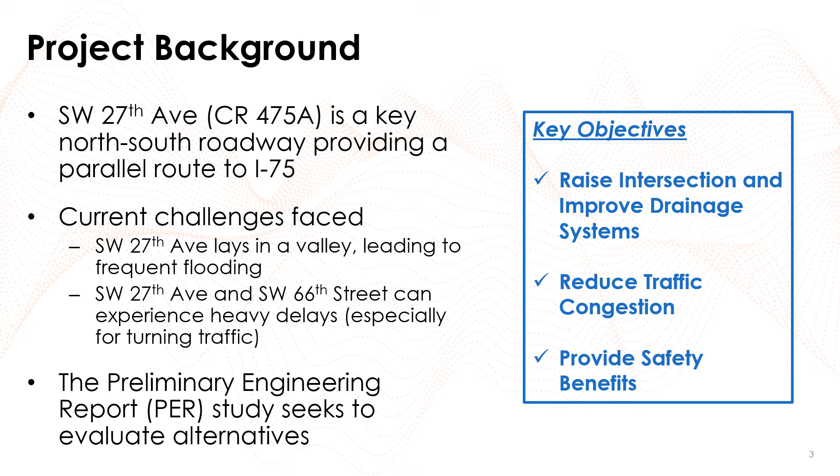The Preliminary Engineering Report, or PER, was initiated to evaluate potential improvements at the intersection and address both existing and future transportation needs. Specifically, the study looked to evaluate alternatives that accomplish three key objectives: raise the intersection and improve drainage, reduce traffic congestion, and improve overall safety for motorists.

This next section summarizes how future traffic conditions were forecast. Understanding future demand is critical because the recommended alternative must perform not only today, but also decades into the future. We reviewed historical traffic data collected between 2016 and 2024 and compared those trends with projections from the Regional Travel Demand Model. The data indicated continued growth throughout the corridor, reinforcing the need to evaluate how the intersection will function as traffic volumes increase over time.

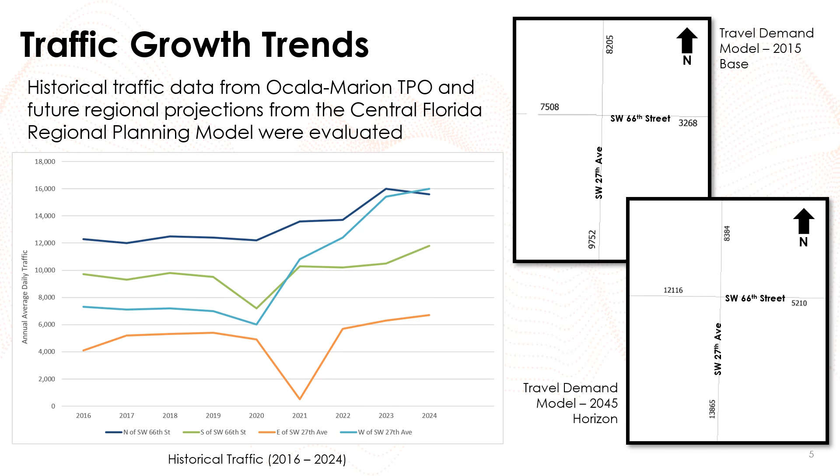Through coordination with Marion County staff and a review of the historical and travel demand model data, annual growth rates were selected for each leg of the intersection. The study evaluated two future time periods for operational and safety performance of the alternatives. 2028 was selected as the opening year for intersection improvements, and a 20-year life cycle was evaluated, resulting in a 2048 horizon year. The projected traffic volumes based on the selected annual growth rates show meaningful increases between the opening year and the 2048 horizon year. These forecasts form the basis for both the operational and safety analysis that follow.

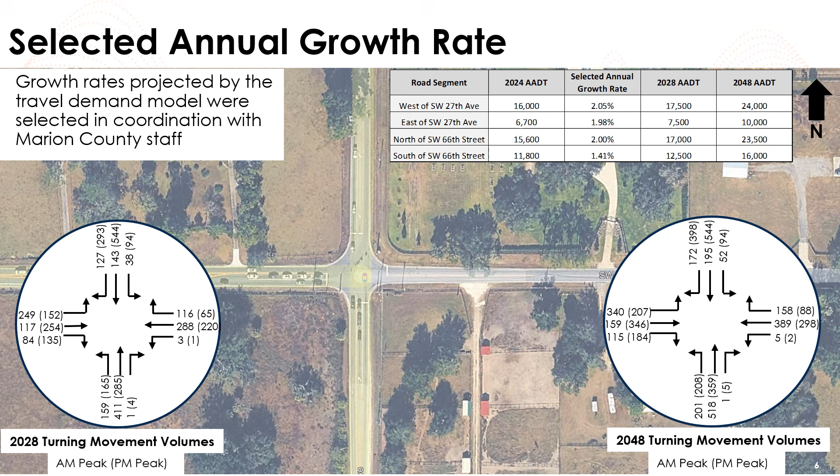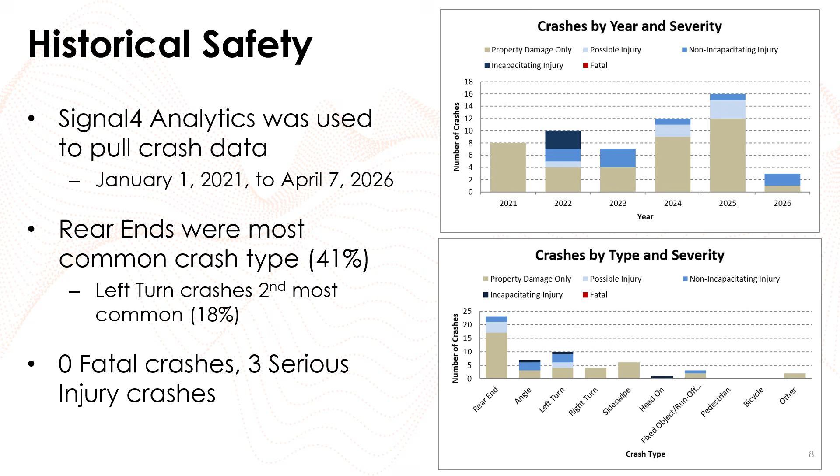Crash records were evaluated using data from January 2021 through April 2026. Rear-end crashes represented the most common crash type, accounting for approximately 41% of crashes, while left-turn crashes were the second most common at 18%. Importantly, no fatal crashes were recorded during the study period, although 3 serious injury crashes occurred. These crash patterns are consistent with intersections experiencing congestion and turning movement conflicts.

We also evaluated future safety using the Florida Department of Transportation's SPICE methodology, which forecasts crashes based on geometry, traffic volumes, and traffic control type. The analysis evaluated a 20-year project lifecycle from 2028 through 2048. The results indicate that roundabout alternatives are expected to produce fewer crashes over the life of the project than signalized alternatives.

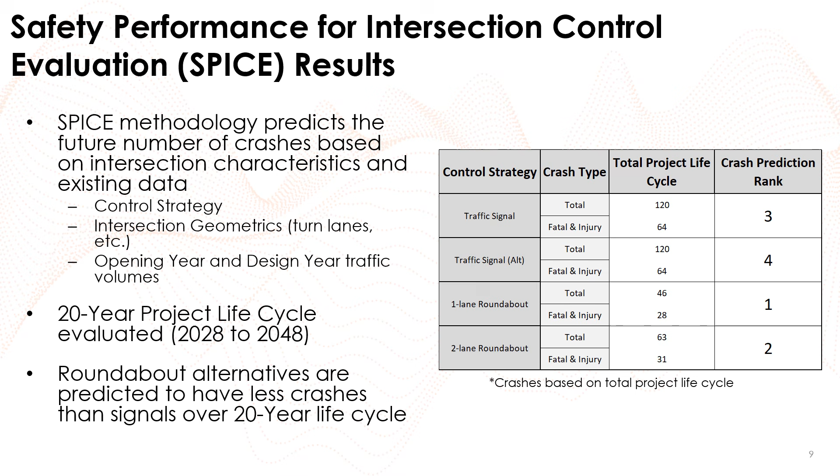The next section evaluates each alternative in terms of traffic operations. Traffic operational performance is measured using level of service, or LOS, which is based primarily on intersection delay. The longer a vehicle is expected to be delayed at an intersection before being able to complete a movement, the lower the LOS grade. Marion County also maintains target LOS standards for roadways, and these were considered in the analysis.

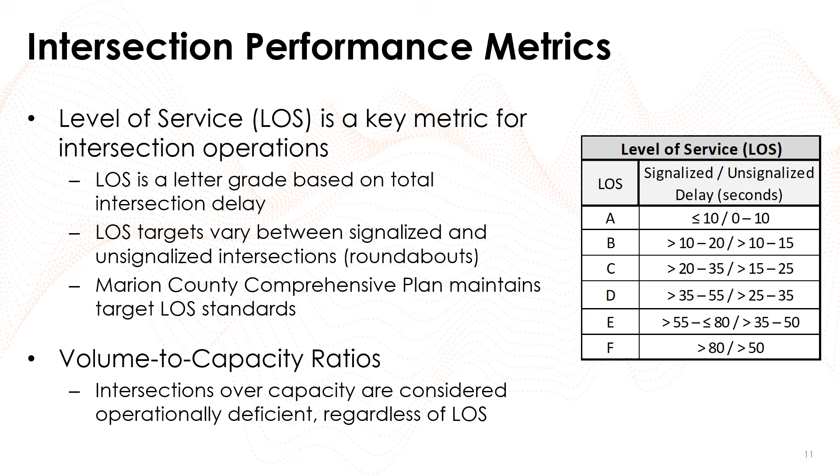Another key traffic operations metric is if the approaching volume of vehicles exceeds the existing capacity of the intersection. These volume to capacity ratios are important because an intersection can sometimes achieve a reasonable LOS while still approaching capacity limits.

Under the existing configuration, the intersection performs acceptably in the opening year. However, by the 2048 design year, the intersection exceeds capacity during both peak periods and degrades to LOS-E in the morning peak and LOS-F in the evening peak. This confirms that the existing configuration is not a viable long-term solution.

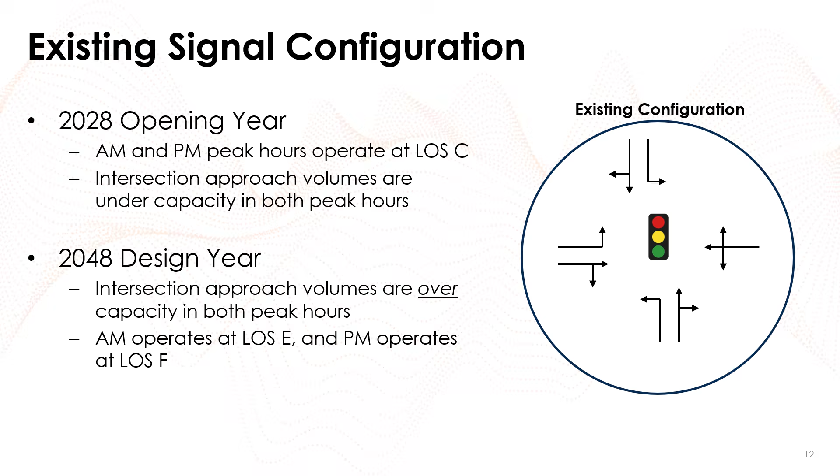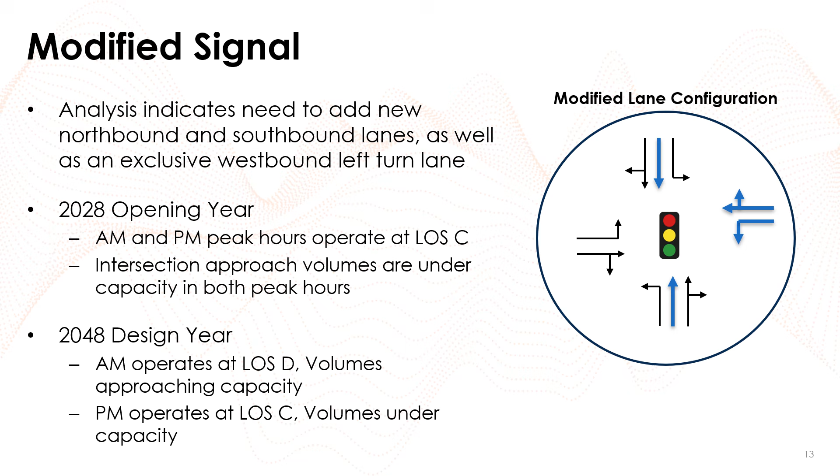A modified signal alternative was developed to add capacity through the intersection. This is achieved through additional northbound and southbound lanes along with an exclusive westbound left turn lane. This alternative substantially improves operations and maintains acceptable performance through the horizon year. In 2048, the intersection is projected to operate at LOS-D during the morning peak and LOS-C during the evening peak.

A single-lane roundabout at the intersection was also evaluated. Initially, it performs well at opening. However, as future traffic grows, the analysis shows the intersection exceeding capacity by the design year and dropping to LOS-F during the morning peak and LOS-E during the afternoon peak.

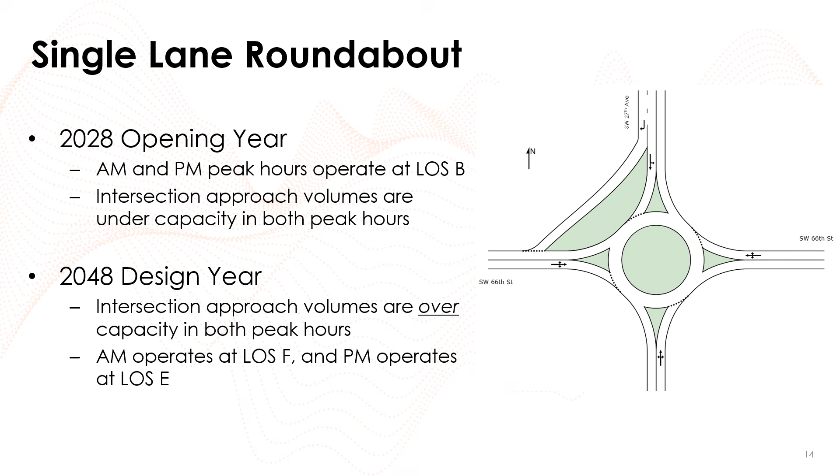A multi-lane roundabout alternative was considered to add capacity through additional lanes where needed to accommodate the projected traffic volumes. The analysis shows LOS-A performance in the opening year and LOS-B performance in the 2048 horizon year, while keeping all approaches under capacity. The multi-lane roundabout provides the strongest traffic operational performance among the alternatives reviewed.

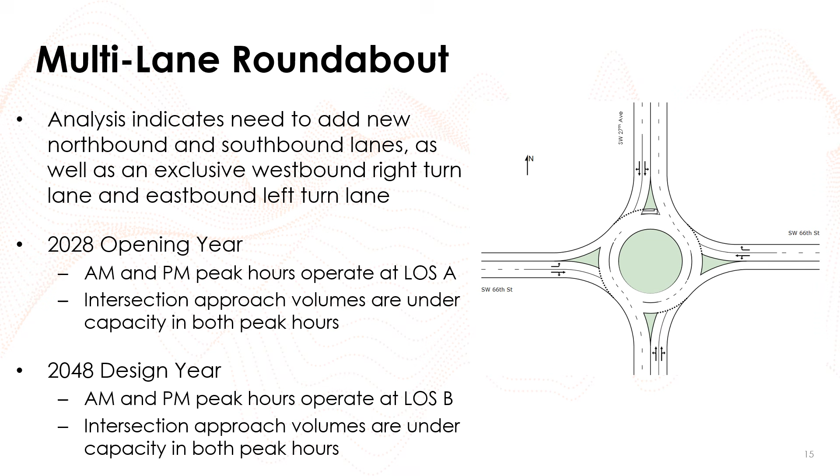This section summarizes conceptual design considerations and the associated construction costs. Conceptual designs were developed for the most viable alternatives, the modified signal and multi-lane roundabout. These designs were used to develop construction cost estimates based on FDOT best practices, including historical pay item costs and allowances for maintenance of traffic, mobilization, and additional contingencies. At this stage, the estimates represent construction costs only and do not include right-of-way acquisition costs.

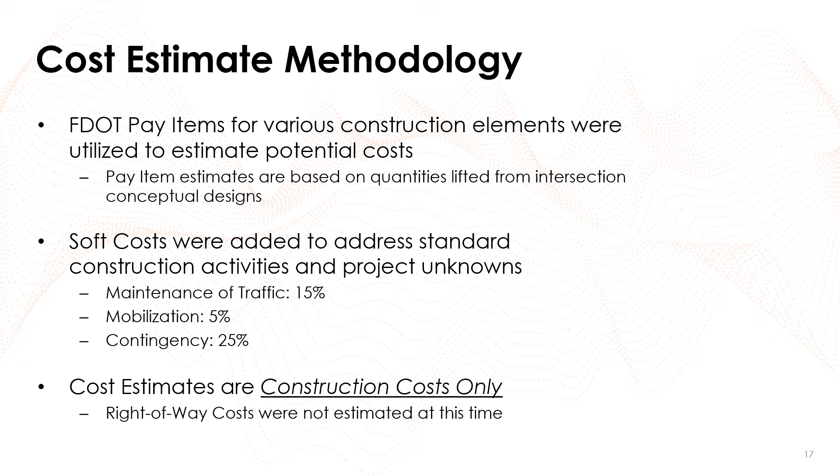Regardless of which control type is selected, substantial site improvements are necessary to address the project's primary objectives. These improvements include raising roadway elevations, enhancing drainage infrastructure, and adding intersection lighting. These critical improvements are estimated at approximately $4 to $4.3 million.

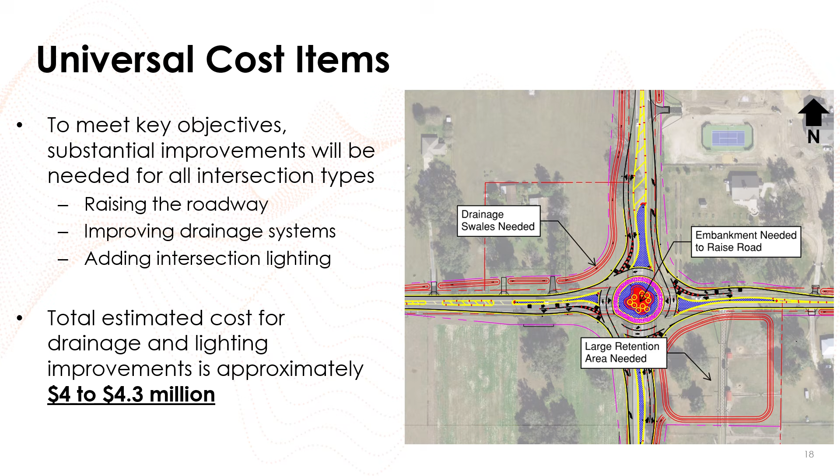This slide illustrates the conceptual layout for the modified signal alternative. This alternative would require roadway widening along North and Southwest 27th Avenue and modifications to the existing signal infrastructure. These modifications, along with the universal cost items shown previously, result in a total estimated construction cost of approximately $5.4 million for this alternative.

This slide illustrates the conceptual layout for the modified signal alternative. This alternative would require roadway widening along North and Southwest 27th Avenue and modifications to the existing signal infrastructure. These modifications, along with the universal cost items shown previously, result in a total estimated construction cost of approximately $5.4 million for this alternative.

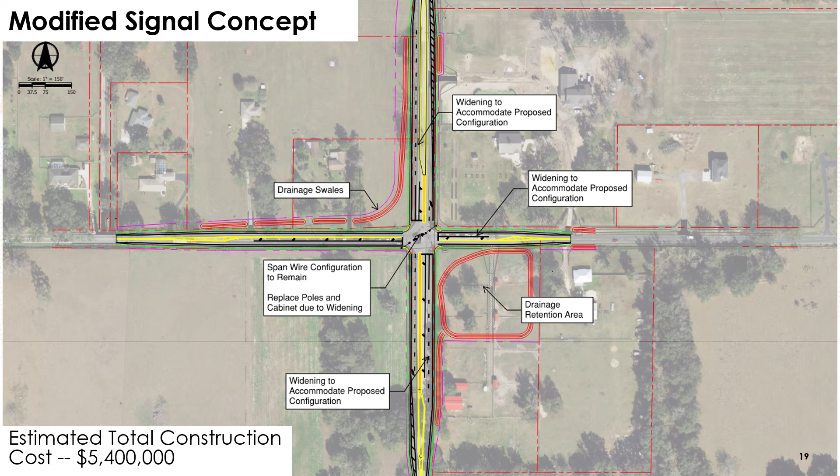This slide illustrates the conceptual layout for the multi-lane roundabout alternative. This alternative would require roadway reconstruction at the intersection to accommodate the roundabout geometry. The total estimated construction cost for this alternative is approximately $6.3 million.

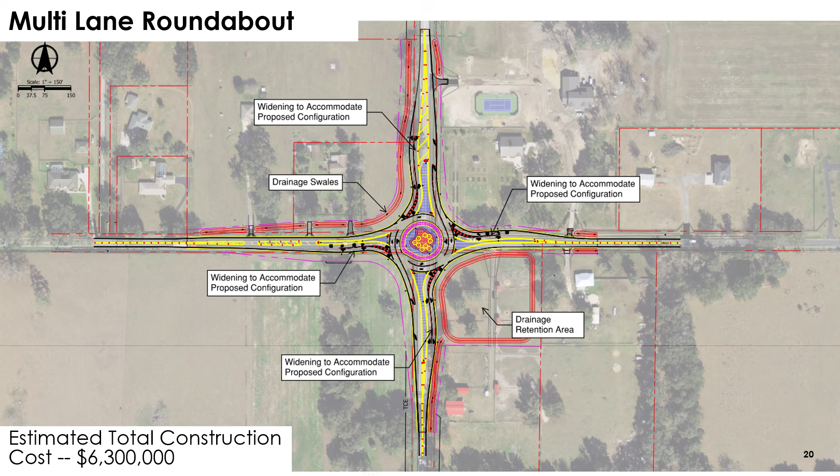This final section summarizes the results of the alternatives evaluation and the recommended alternative. Of the alternatives evaluated, the existing signal and single-lane roundabout were ruled out early due to poor long-term traffic operations. A benefit-cost analysis was developed for the remaining two alternatives, the modified signal and the multi-lane roundabout. This analysis brings together traffic operations and safety improvements to quantify a dollar amount representing the total project benefit. This benefit was compared against the construction cost to generate the benefit-cost ratio of each alternative.

Estimated right-of-way impacts were also evaluated, though they are similar between the modified signal and the multi-lane roundabout due to the drainage system improvements and roadway widening needed. The multi-lane roundabout achieves the best overall traffic operational performance, maintains capacity through the design year, is predicted to have fewer crashes, particularly fatal and injury, and demonstrates a stronger benefit-cost ratio.

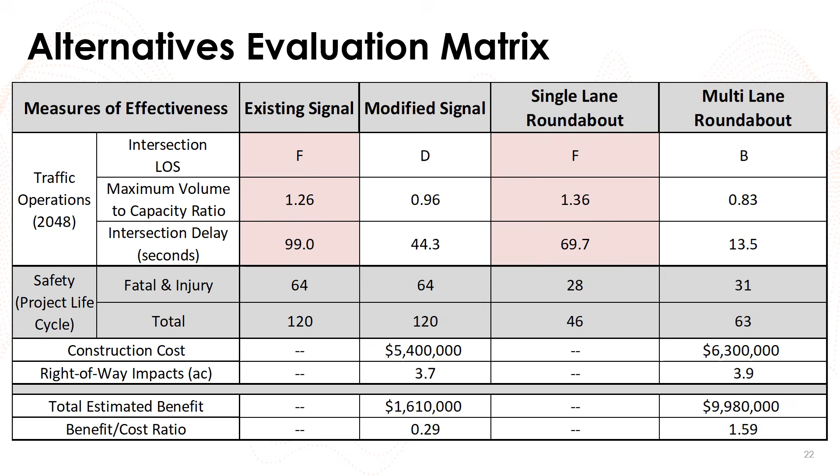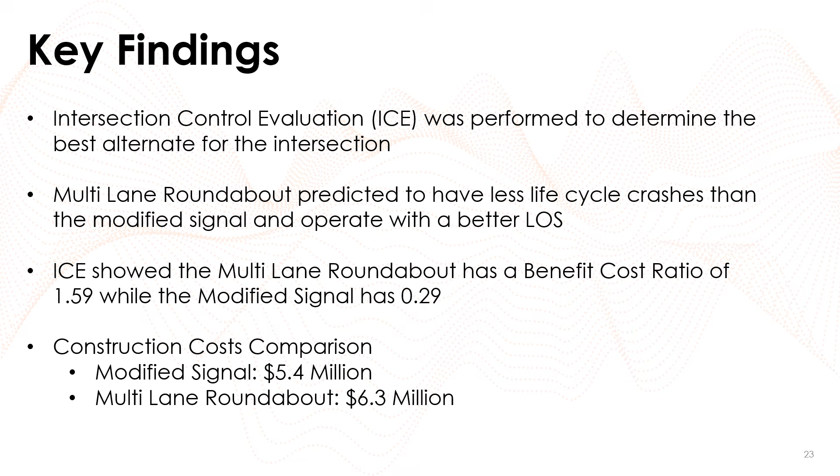In conclusion, the multi-lane roundabout is projected to provide better traffic operations, improved safety performance, and a stronger benefit-cost ratio than the modified signal alternative. While the roundabout carries a higher estimated construction cost of approximately $6.3 million compared with approximately $5.4 million for the modified signal, the long-term benefits justify the additional investment. Based on the evaluation completed in this PER, the multi-lane roundabout is the preferred alternative.